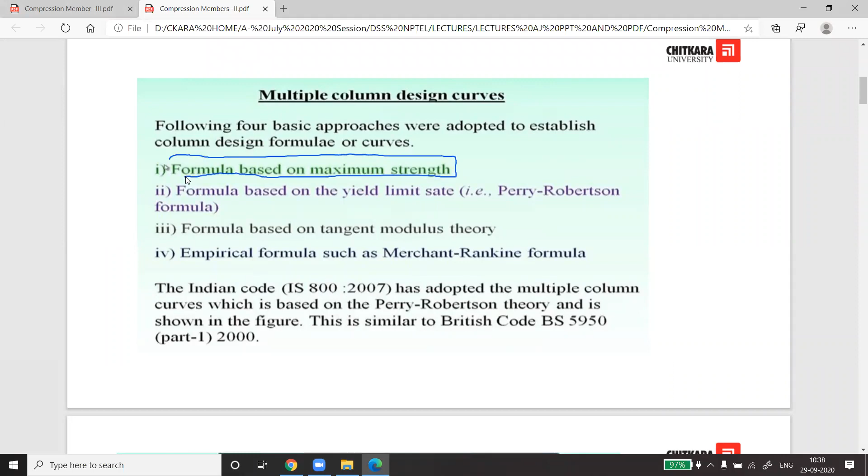The formula based upon the maximum strength is primarily governed by the crushing strength, so we are not following this one. The formula based upon the yield limit state - that's the Perry-Robertson formula - is, as per IS 800 code, the formula which is adopted by Indian standards.

So this is the formula that we shall be focusing on. IS 800 has adopted this formula, the Perry-Robertson formula. It is also written on the bottom part of the slides - the Indian code IS 800 has adopted the multiple column curves, which is based upon Perry-Robertson theory, and it is the same as adopted by the British code.

This is just reference information. More importantly, we are following this Perry-Robertson formula, which is based upon the theory given by him, and he has given multiple curves. If you read the bottom part again...

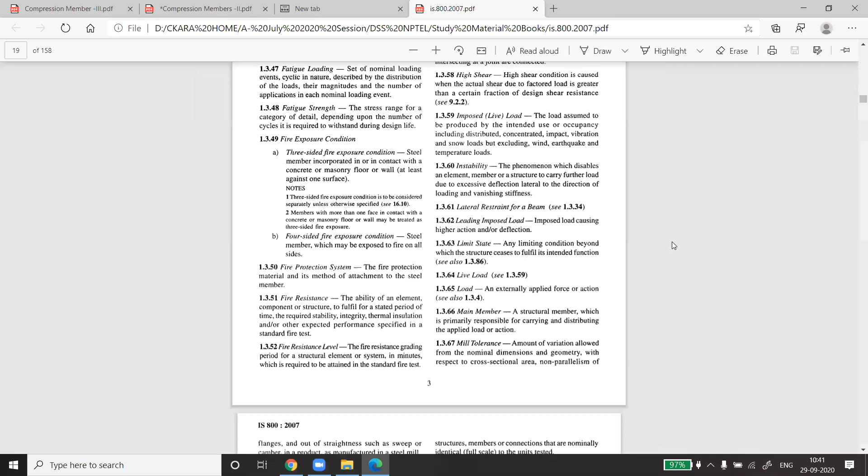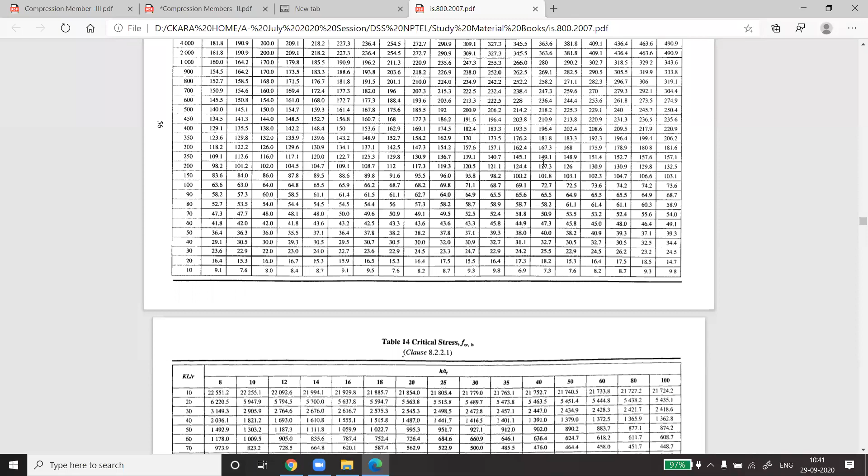But you should focus on this Perry-Robertson formula that is adopted by IS 800 2007, right? So this is just the reference slide, and we shall move on to the curves, Perry-Robertson curves, which are also given in your IS 800 booklet. I'm opening it, you can also open your IS 800 booklet. Go to page number 34, 35.

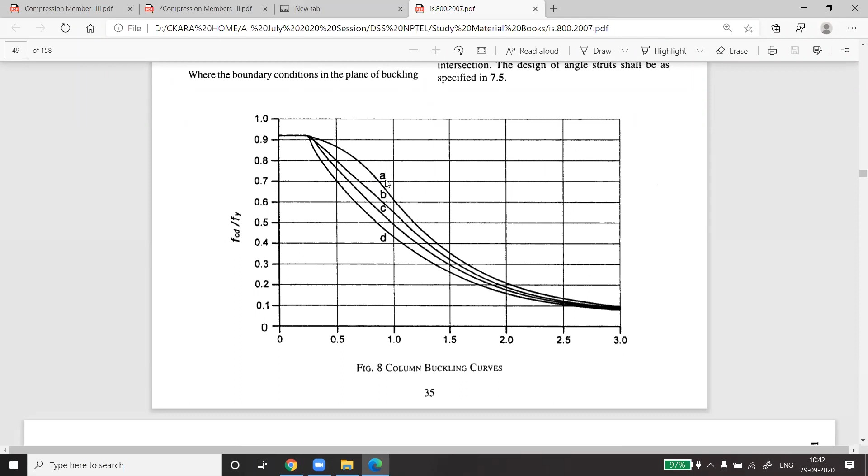If you see this page, these are column buckling curves, right? Yesterday we also had a little reference to the column buckling class, according to the slenderness ratio and the structural dimension of the column. So we are going to discuss the various classes: class A, class B, class C, and class D, right?

And these curves are the Perry-Robertson curves, based upon Perry-Robertson theory, and this has been adopted by IS 800 Indian standards, right? Just have to refer to this curve - you don't have to read anything from this curve because all these values have been converted into tabular forms, which we shall be discussing after a few slides. But this is just the reference.

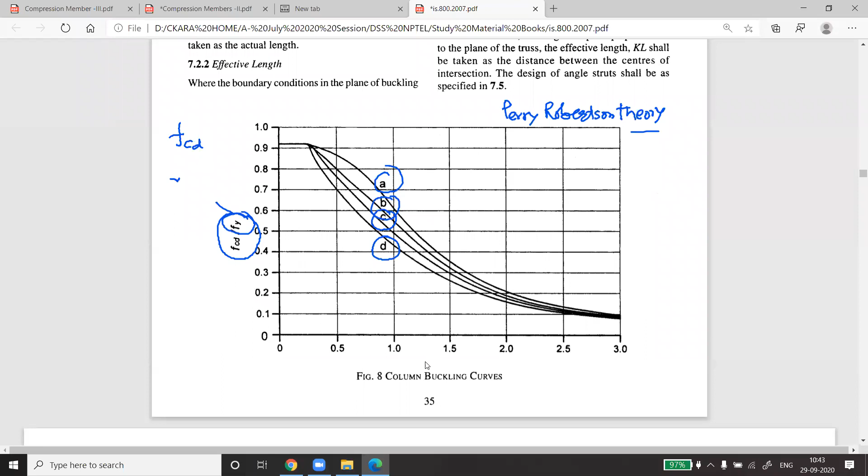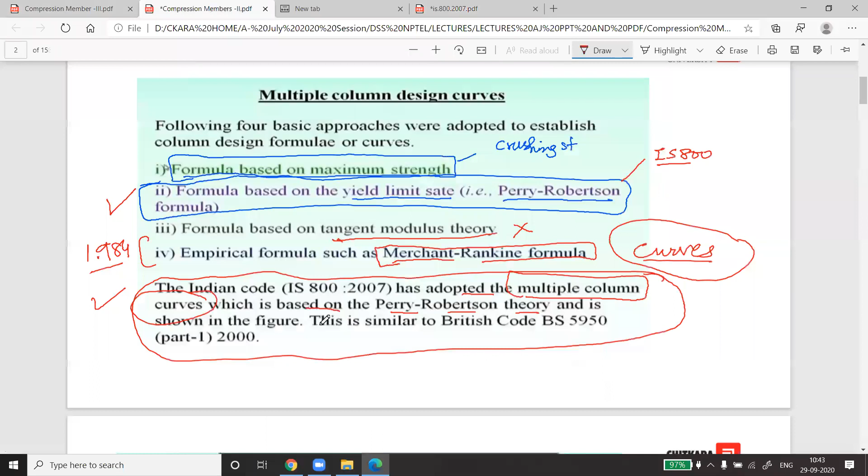This is the curve between FCD, the compressive design stress, and Fy, which is the yield stress. So these terms are clear. And along this direction, this is the slenderness ratio. So based upon these two factors, these curves have been given, and this is what we call Perry-Robertson curves, right? This is given in your IS 800 code as well.

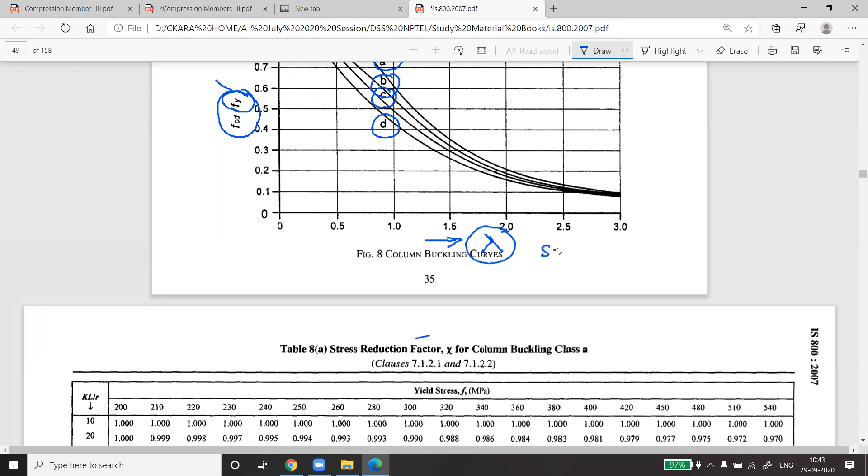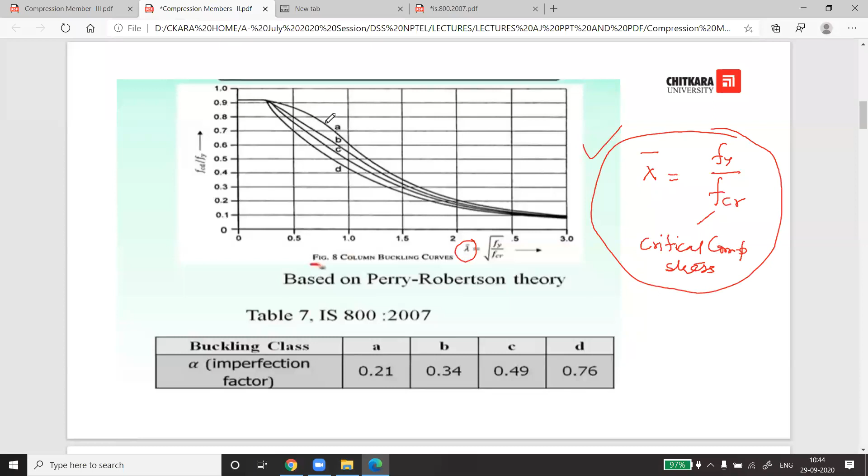Lambda critical is equal to Fy divided by FCR, where FCR is the critical compressive stress. But at the same time, one should not be worried about how to get the values from this, because all the values based upon these curves have been converted into tabular form. So that table we shall be discussing in the following slides.

And the second table, table number 7 - yesterday we were discussing also that based upon the sectional dimensions, cross sectional dimensions, like the length, width of the member, and also the thickness of that member. For example, this is a T section - this is flange, this one is web. So its thickness we write as TF, and web thickness is TW. All these dimensions are given in steel tables, and there is the width of the flange, we call it BF, and then height or depth of the section, we call it D or H, right?

So based upon these cross-sectional dimensions, we are going to define class A, class B, class C, and class D. And why do we need it? Because based upon class, which we call buckling class, we need the imperfection factors. For class A, the factor shall be 0.21 - when we use it, it will be more clear to you. For class B, it is 0.34, then 0.49, and 0.76 based upon the class.

Now in the next slide, this is the class - how do we define the class? Basically based upon the dimensions. And the same table is there in your IS code. I'll be opening the same page from your IS code, because you shall be referring to it all the time. You open table number 10.

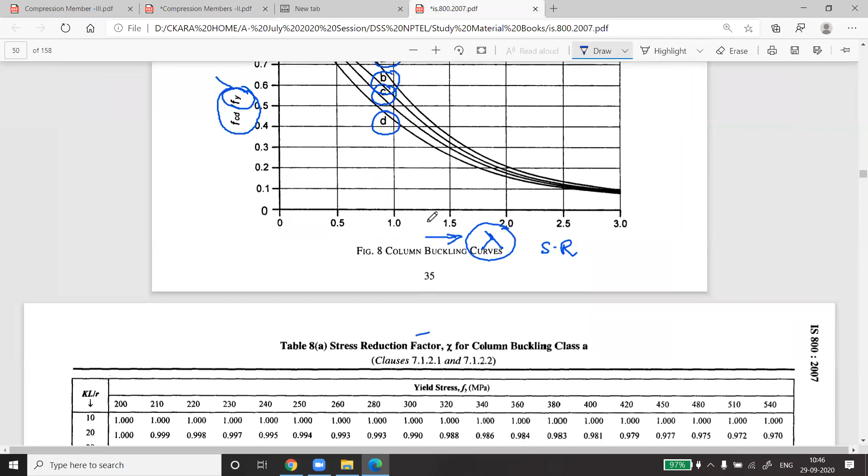This one. This is table number 10.

Buckling class of cross section. Same figure that I've taken in the slide, this is the page I have taken from table number 10 of IS 800. So I'm referring directly to that table. It has first the cross section,

then the limits, then buckling about axis, and the buckling class. When we talk about the cross section, there are certain dimensions attached with certain cross sections. The rolled I sections are the ready-made sections we get from the manufacturing industry. That height is there, this width is there - these are the two prime factors we shall be focusing on from this diagram. And thickness of the web, this is thickness of the web, and thickness of the flange.

So these are the four dimensions based upon which we shall be defining the buckling class. Ultimately we have to define the buckling class, and according to the buckling class we need the imperfection factors and various other calculations. And the second thing is the axis, buckling about axis.

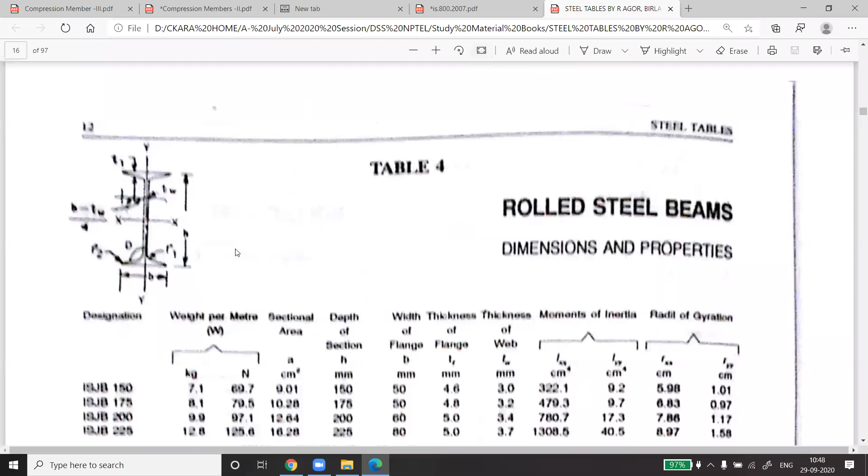if you look at the steel tables, actually, if you look at the steel tables, I'm opening it right now. This is the steel table. And I'm opening the I section part. So if you look at this steel table right now, though it is not very clear, all of you have got it, and if you look at the section axis here, this value,

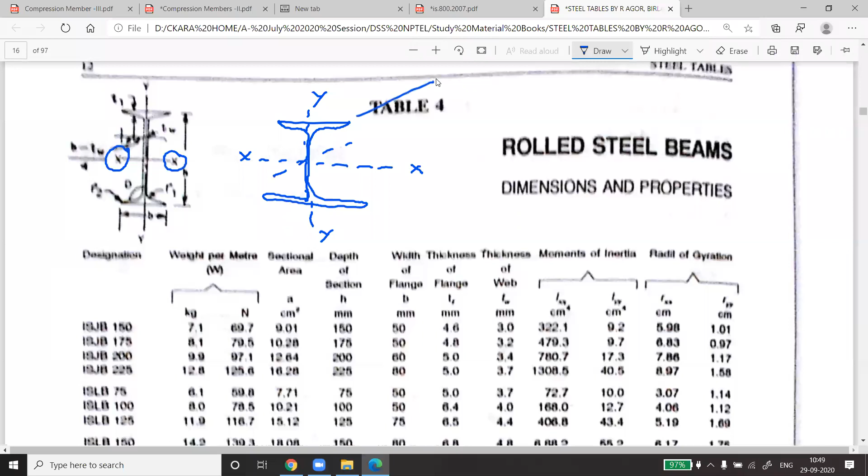I'm redrawing it. This has been mentioned as x-axis, and this has been mentioned as y-axis. And the third one, along the length of the member, it is referred to as z-axis. But we are using this member as a column - we are using this column, this member, as a column like this.

This is the I section, and we are using it as a vertical member. So in this case, this axis which is mentioned here as x-axis, we shall be referring to as z-axis. And this axis, this one, we shall be referring to as x-axis. And the y-axis would remain the same. I'm sure it's clear. So if you look at the diagram again, this IS page, this has been mentioned as z-axis.

The buckling can happen along z-axis. Buckling can happen along y-axis. Then when we are doing certain numericals, we shall be very clear. So we have to consider the weakest section - weakest section means along which axis buckling can happen first. So there are certain calculations based upon that we shall be defining it.

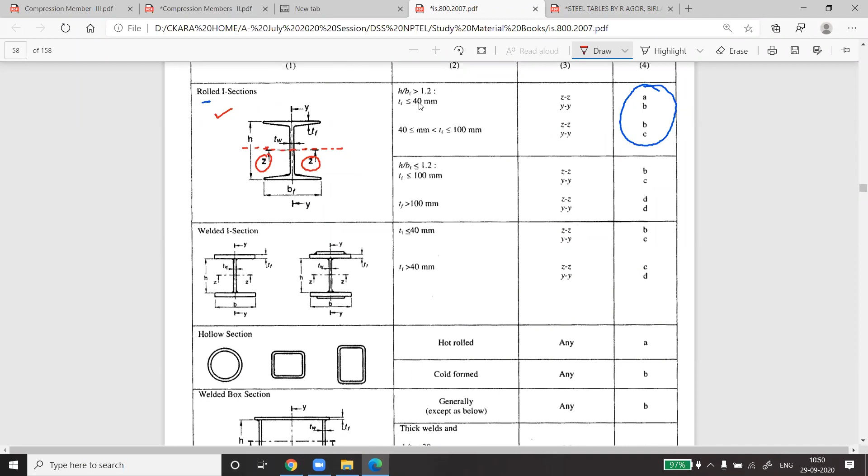But for now, you have to just see that based upon the sections and based upon the cross-section dimensions, we are going to define the buckling class. So how to define? There are certain limits: H upon BF - if it is greater than 1.2, and along with TF, TF is the thickness of the flange,

depending on the combination of these, there can be two failures - along z-axis or along y-axis. If it is along z-axis, we consider it as class A. If it is along y-axis, we shall consider it as class B. We will repeat this when we are doing the numericals. There are certain other values you don't have to remember, but as and when the case comes, we shall be referring to this table, and the primary function of this table is that we are going to define the buckling class - this is the target.

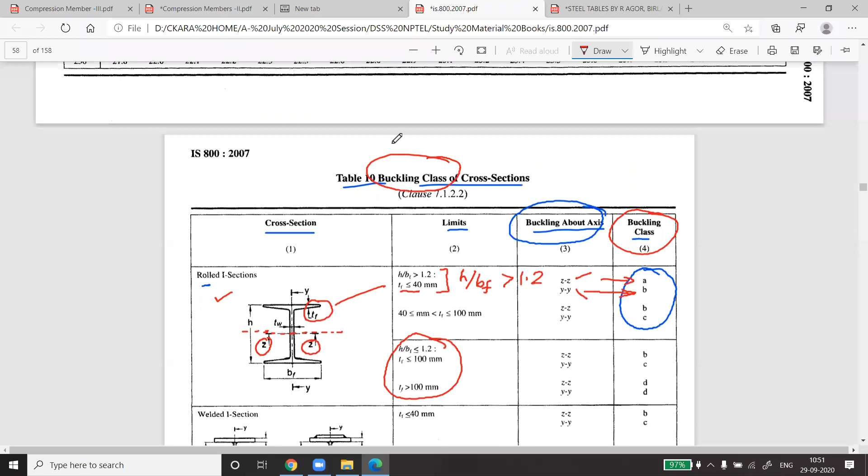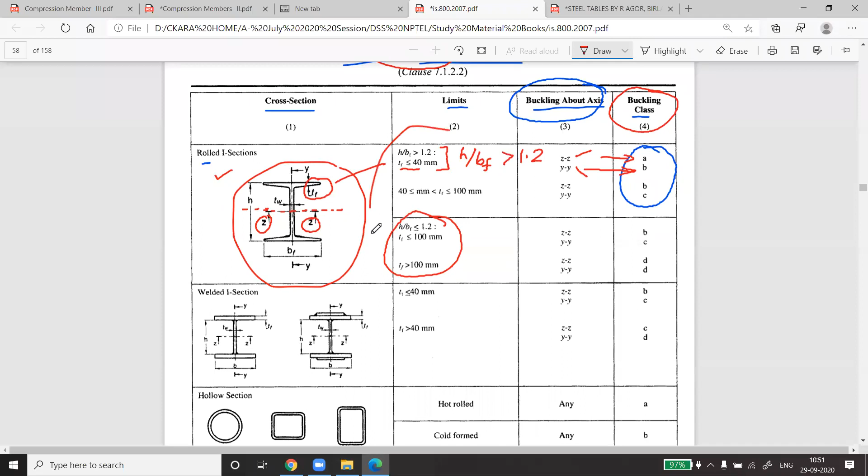So when we define the buckling class, we shall be referring to this table, and based upon these cross sectional dimensions, if it is a rolled section, we follow this criteria. If it is a welded section, we shall be following this criteria. If it is a hollow section, we shall be following this criteria. It's a welded box section, we shall be following this criteria. And if it is angle, channel, or solid section, or if it is a built-up member, we shall be following the respective criteria.

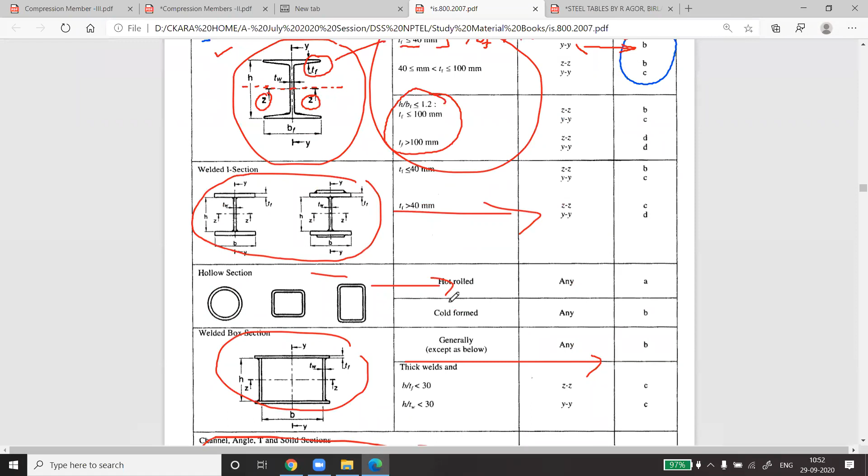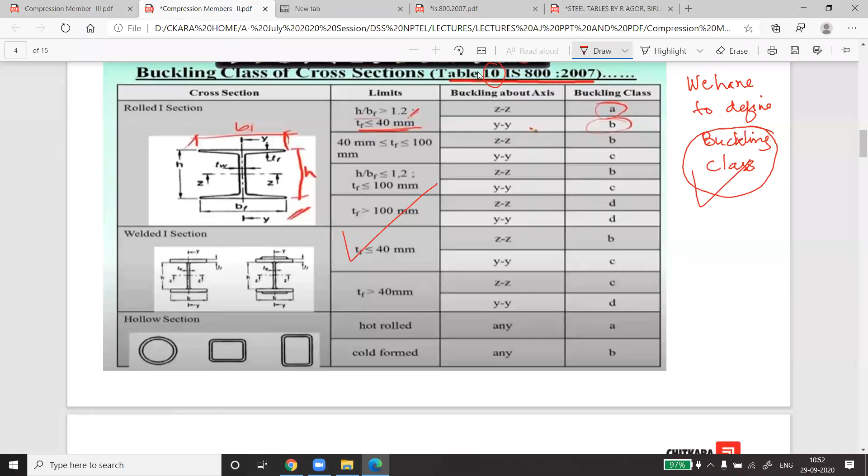So all these things we shall be clear when we are doing one numerical, and this is not that difficult as it looks, but just have to mention - refer this table to define the buckling class. So this is the table which has been reproduced from the IS. So all you have to remember is that we have to define buckling class before we design the member or find the strength of the member, because buckling class would define the slenderness ratio, and slenderness ratio would define the ultimate load carrying capacity of that member. Imperfection factors and all these things shall be clear from this table.

And this is the same table, the extension of that table already shown in IS 800.

So now coming to the design strength, our numerical work is about to start. Just be very clear and sure about this process. The good thing is you don't have to remember anything, just refer to the things.

So open the steel IS 800. This is clause 7.1.2. Already we referred that PD, design load capacity, has to be more than the load applied on the member. P applied, whatever load is applied on it, the strength of the member should be more than that.

And PD in general is given by AE into FCD. AE is the effective area of the member, and that shall be governed by clause 7.3.2.

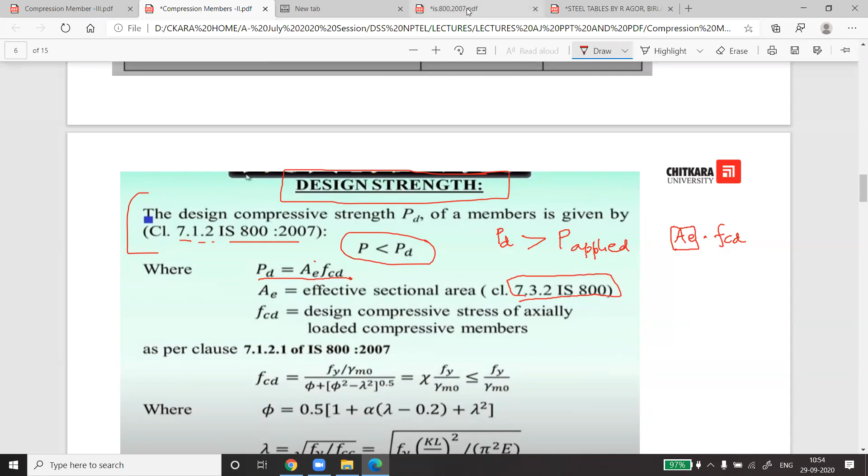I can open it, this is the clause I was reading. Design strength 7.1.2: P shall be less than PD, or PD shall be greater than P. And PD is given by AE into FCD, where A is the effective area.

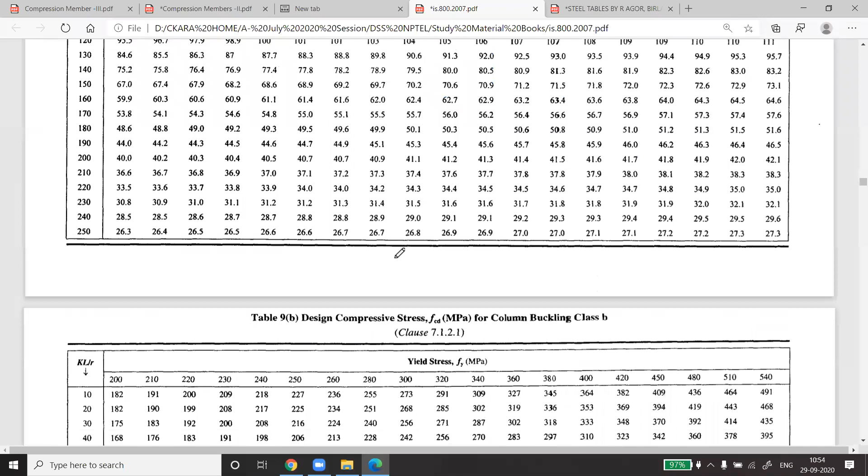And effective area is given by 7.3.2. You can read it from there. This is effective area - if you read it, the gross sectional area shall be taken as the effective sectional area of all compression members. For example, you take an I-section here.

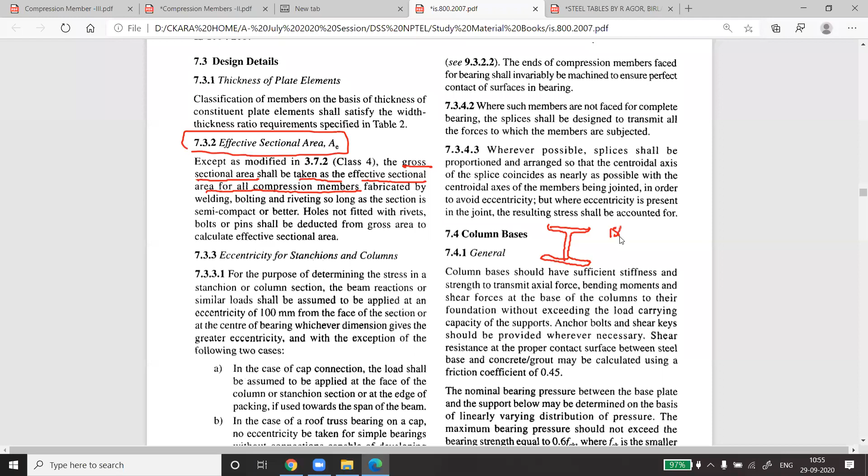You take an I-section, ISHB 250. If you open the steel tables for ISHB 250, this is the steel table. Look at ISHB 250 - there are two values here, one is 51.0 kg per meter, another is 54.7 kg per meter. This has to be defined for you. You have to get the area from this, and area is given in the fourth column. So this is the area.

That's all. So here there is no difficult task. You just have to read the relevant column to get the area.

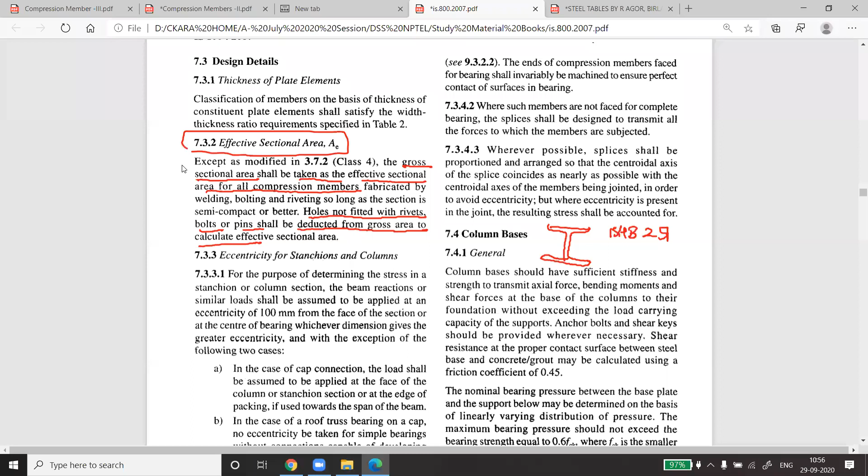If you keep reading this 7.3.2: the holes not fitted with rivets, bolts or pins shall be deducted from the gross area. If bolts and rivets are fitted, then we shall consider the total area. But if there are holes without rivets fitted, then we will subtract that hole area. This is the only meaning of this effective area.

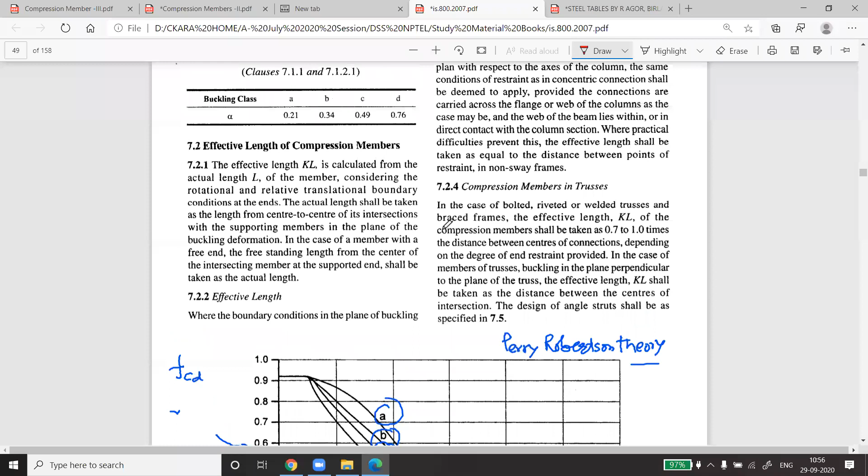Coming back to the slide, this formula is given in the code as well. I'm shifting to the code page so it will be easier to read. This is section 7, beginning of the section, and this is the page. 7.1.2.1 - primarily what we need to do is find the FCD.

Once we find FCD, we shall multiply it with area - this is the formula. FCD multiplied by area. Finding area is not a big task, we can get it from the steel tables or directly from the geometry of the section.

The second part is FCD. How to get the FCD? That is defined by this formula. So FCD, or the design compressive stress, is given by Fy divided by gamma MO. Gamma MO is clear to you, Fy is clear to you - for example, 250 Newton per mm square, divided by phi.

Plus, within bracket, phi square minus lambda - lambda already we have defined, lambda is the slenderness ratio - whole raised to power 0.5. And what is phi? Phi is given by this formula: 0.5 times 1 plus alpha times lambda minus 0.2 plus lambda square.

Now there is another term coming here - alpha. So the formula is to be calculated in this direction. To find FCD, we need to first find the value of alpha. Alpha already we have defined - somebody can tell me what is alpha?

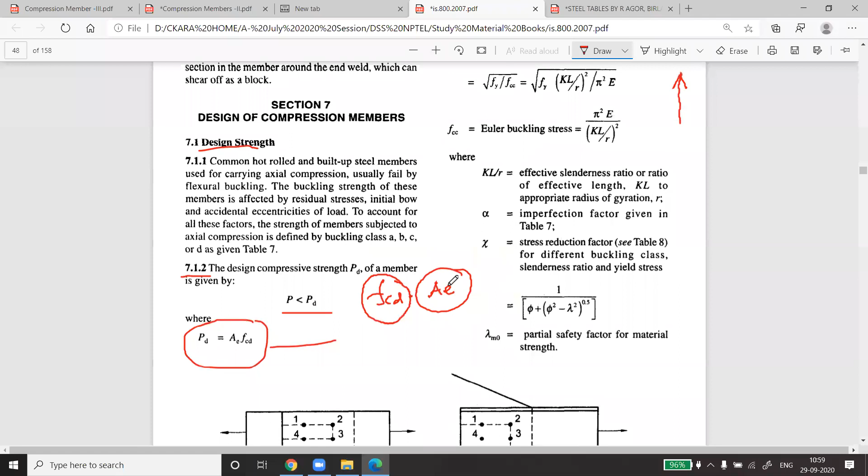What is alpha? It's the imperfection factor. So to find the imperfection factor, what do we need to find? The buckling class - buckling class A, buckling class B, buckling class C. That was table number 7. So to find the buckling class, we need to find the geometry, and based on the geometry we find the formula.

Then we'll work out the value of phi. And lambda is the non-dimensional effective slenderness ratio, calculated by Fy upon FCC - we did this yesterday too. The value of FCC is put into this. And what is K? K is the factor calculated based upon the end conditions. Yesterday we did table number 11 - I am showing it again.

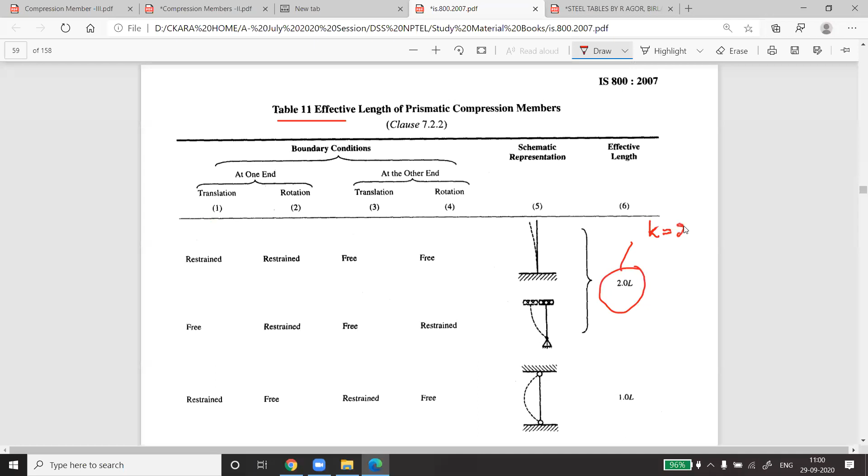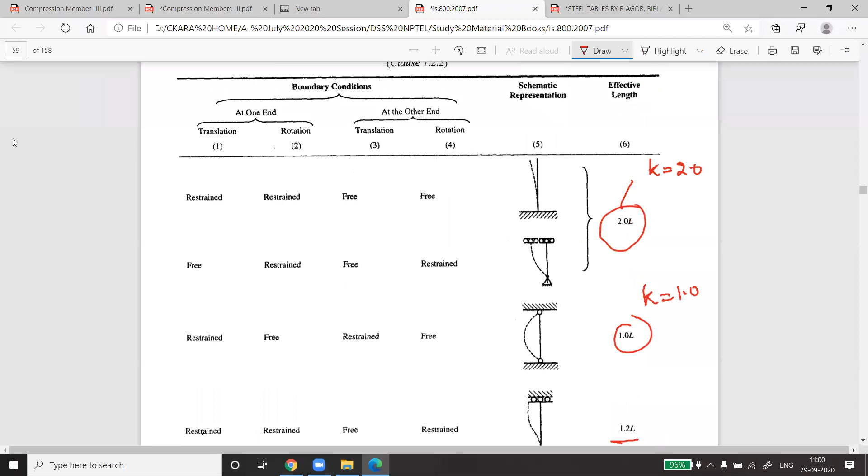This was table number 11, and this is the value of K. If here 2 is written, then K is equal to 2. In this case K is equal to 1, right? In the third case this is 1.2, so K is 1.2. Here K is 0.8. Here K is 0.65. So we'll work out K according to the end conditions given in the numericals.

So coming back to the code part, that formula, we will work out K. That length shall be given to you.

Then R, R is the appropriate radius of gyration. We consider two gyrations - one shall be RZZ and another shall be RYY. Whichever is minimum between the two, we will consider that. That shall be clear when we calculate it.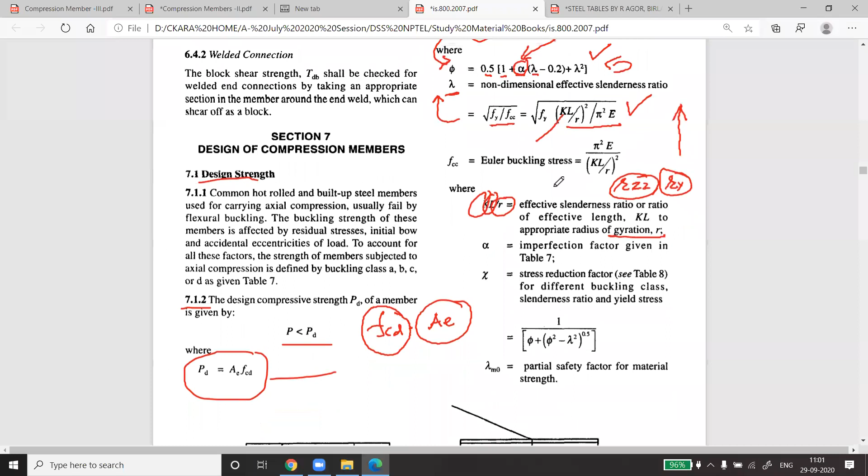So this is the formula that has to be used to find lambda. Lambda is further used to find phi, and phi is to be used. I'm just rubbing it off to make it clear.

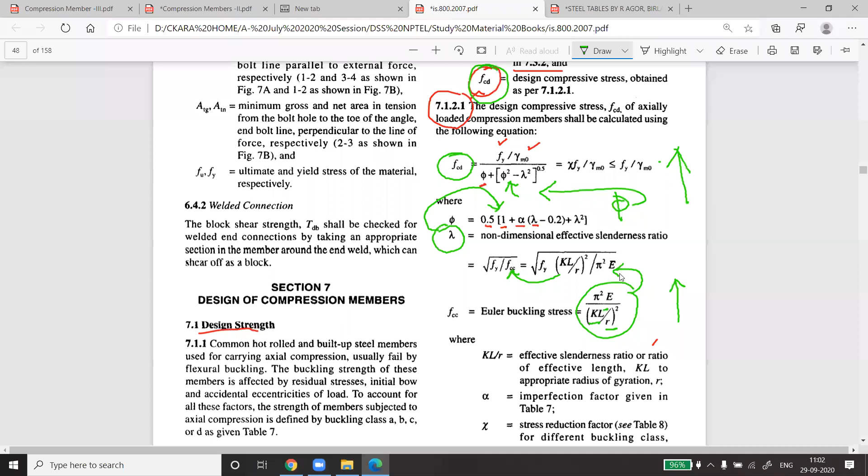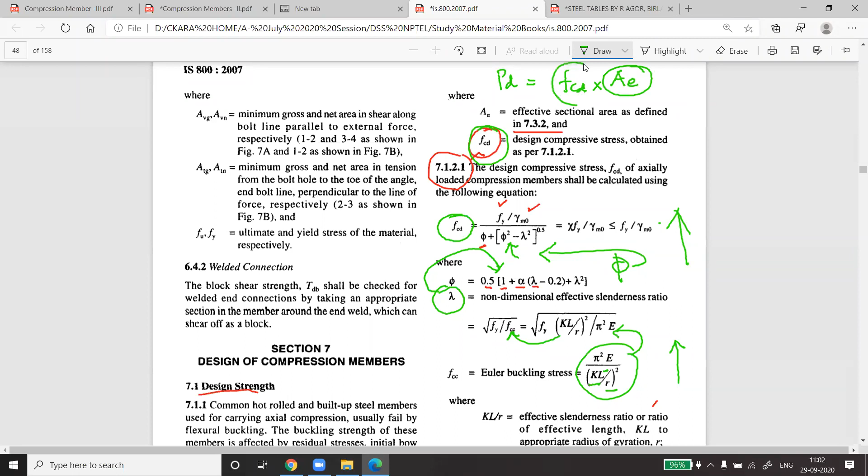So once we get the value of FCD, then we can get the strength - PD shall be equal to FCD multiplied by AE. AE is to be calculated according to the geometry of the member, and FCD as I just mentioned. This shall be very clear when we do the numerical.

There's another one. Can somebody tell me what we call this one? The one I just highlighted in green, what do we call it? Can somebody tell me, what is this?

This one is phi, right? This one is lambda. What is this? How do we call it? What is its name? Anybody?

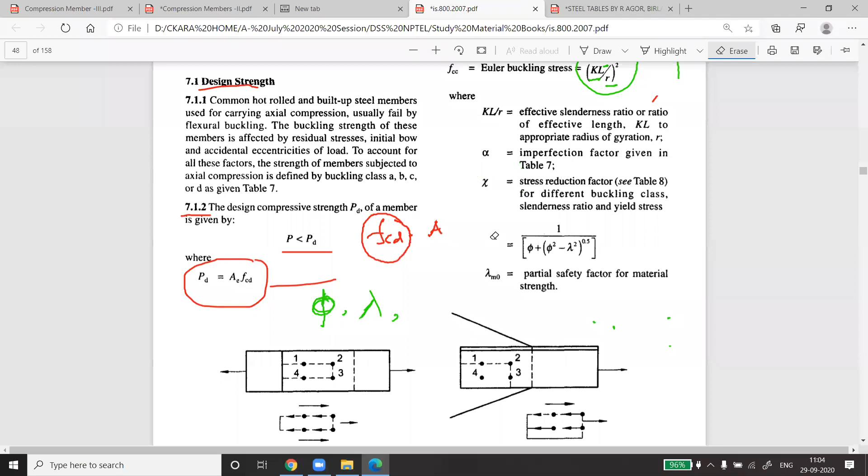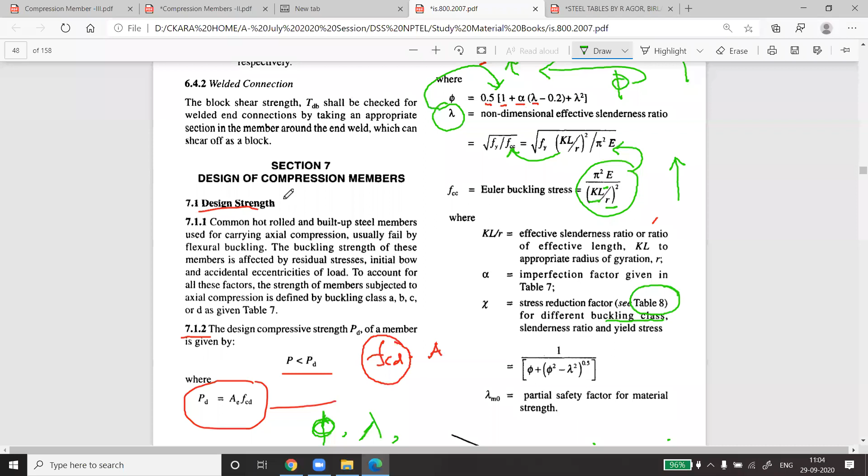So we won't need this in the calculation, because we have already taken this factor into consideration. So this is what we call the stress reduction factor, and this is as per table number 8 for different buckling classes. And what is table number 8? There are A, B, C, D - there are 4 tables. I'll show you this.

These are the tables - stress reduction factor, table 8, and this is the value of chi. 8A for class A, table 8B for class B, table 8C for class C, and table 8D for class D, right? So we will be referring to this.

I'm sure you are able to read this table. This is slenderness ratio. Along this direction we have the yield stress. Generally we will be referring to this 250, right? Whatever value of KL upon R we get, accordingly we will interpolate the values to find them, right?

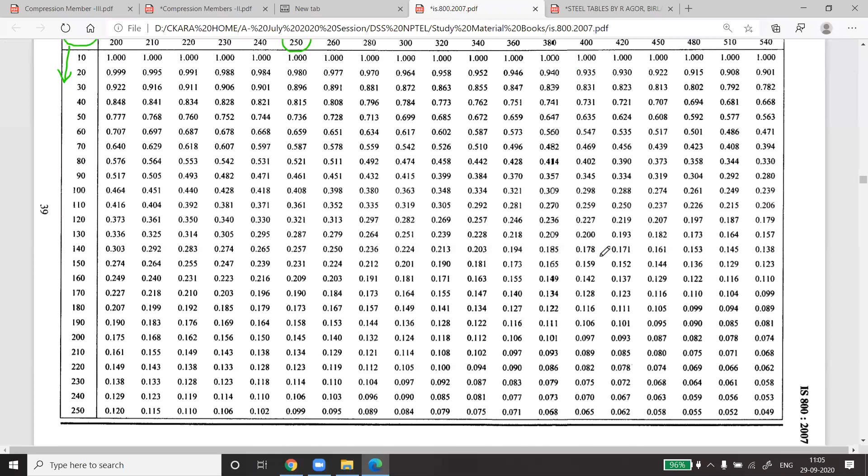A very small exercise, if all of you can do it. Can you find - okay, I'm writing it - can you calculate from this table? I'm referring to table number 8D, right? In 8D, find the value of

KL upon R. If it is 75, KL upon R if it's 75, then what shall be the value of chi for FY 250? Quickly calculate and tell me.

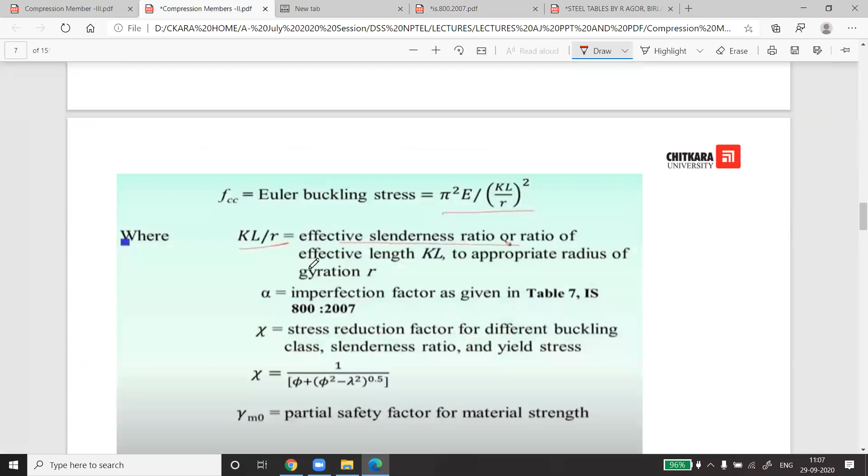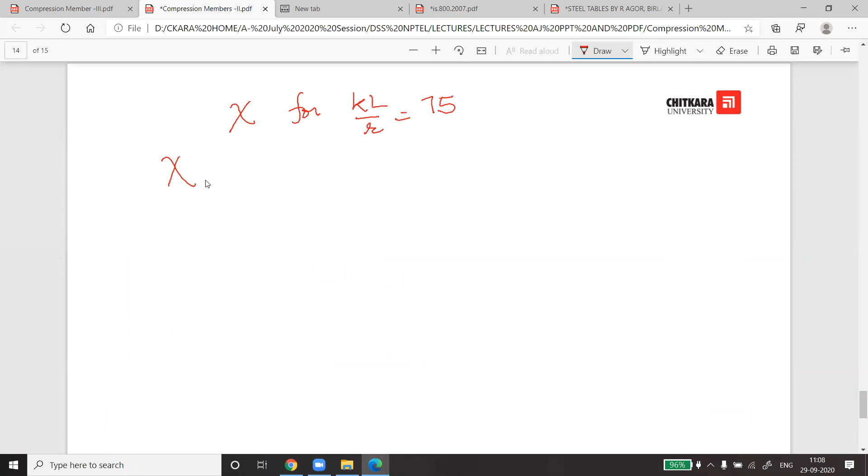मैं इसको दोबारा ड्रॉ कर देता हूँ. I'm just coming to the blank page. Okay, this is the blank page. We have to find the value of chi for KL upon R is equal to 75, right? The value of chi for 70, the value of chi for 80 from the table, and Fy is 250 MPa.

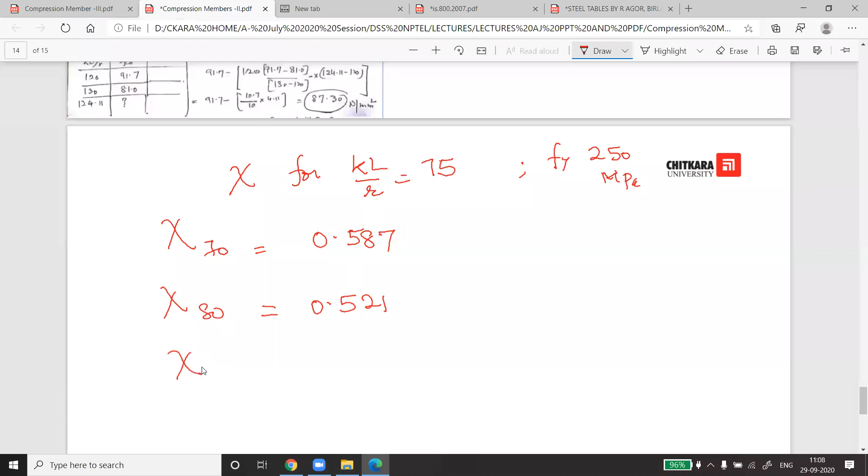Value of 70 as per table is 0.510... it is 0.587 and it is 0.521. So we have to find the value of chi for 75. How much? This is the question, right?

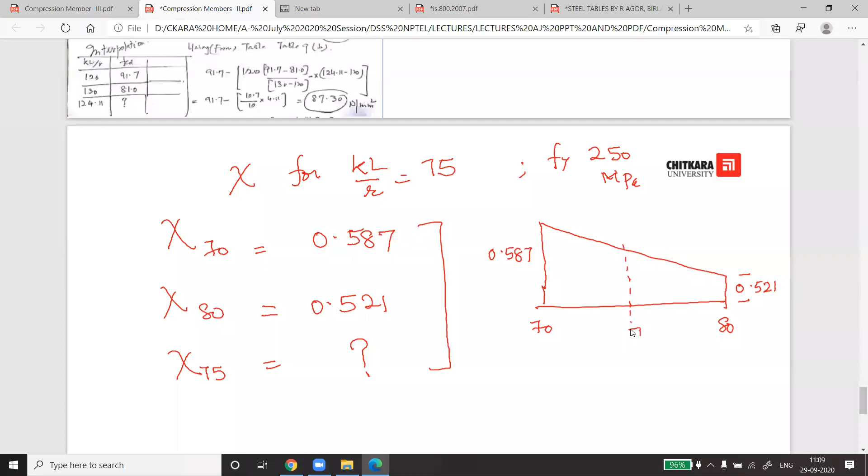So interpolation हम ऐसे करते हैं, like this is the mathematic process, right? This is 70. The value is 0.587. This is 80. The value is 0.521, and we have to find the value of 75. How much is this? Clear?

जल्दी से बताएं. The chi for 75. मैं लिख देता हूँ, अगर किसी को समझ लग जाएगी तो उसको नहीं लगा तो पूछ लेना. 587 इतना तो श्योर है कि 0.554, 521 और 587 के बीच में होगी, राइट? So 0.554, राइट.

ठीक है. अगर किसी को नहीं समझ लगा तो मैं यहाँ पर लिख देता हूँ हाउ डू वी डू इट एक्चुअली, राइट? सो इट शैल बी लेसर देन 0.587. कितना लेस होगा वो उसको हमें वर्कआउट करना है, राइट? तो 70 है तो इतना है, 80 है तो इतना है, और जस्ट अ मिनट.

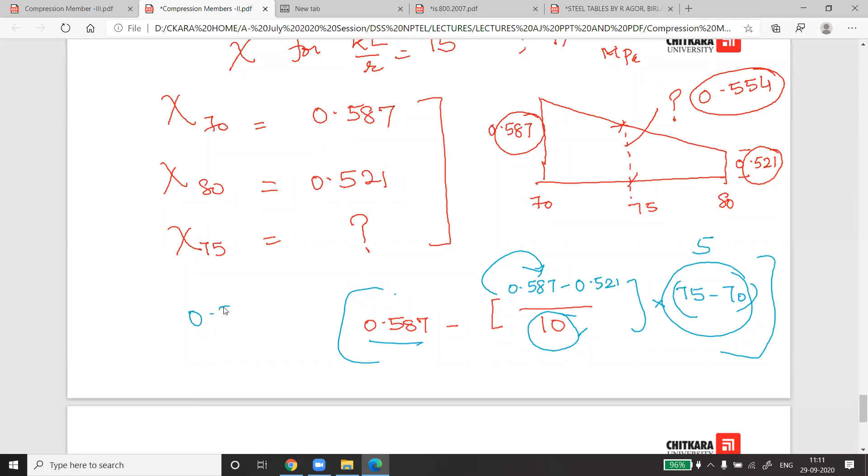(0.587 minus 0.521) multiplied by (75 minus 70), राइट? 10 के पीछे इतना चेंज हो रहा है और 5 के पीछे कितना होगा? दिस इज 5, दिस इज 10, और इसके पीछे ये वैल्यू का वर्कआउट करेंगे. अगर कैलकुलेशन सही है तो इट शैल बी 0.554. This is what we call interpolation. So one has to be very, very sure about interpolation because we shall be using it, right?

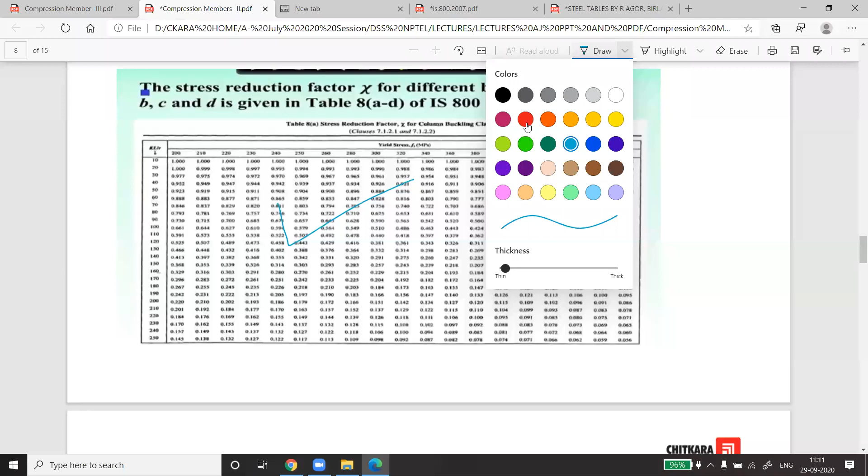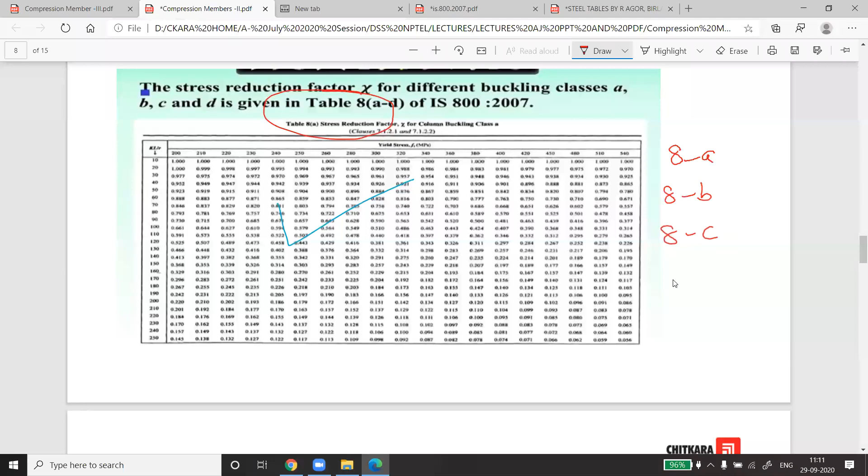So I'm moving ahead with these slides. So the formula is completed, and these are the tables we shall be referring. इसको अभी देखने की जरूरत नहीं. Only thing that we need to know that we shall be using table 8. 4 टेबल A to D हैं, ये हम यूज करेंगे to find chi - 8A, 8B, 8C, and 8D. These are the 4 tables to find the value of chi, right? And similarly, there are 4 tables to get the value of FCD.

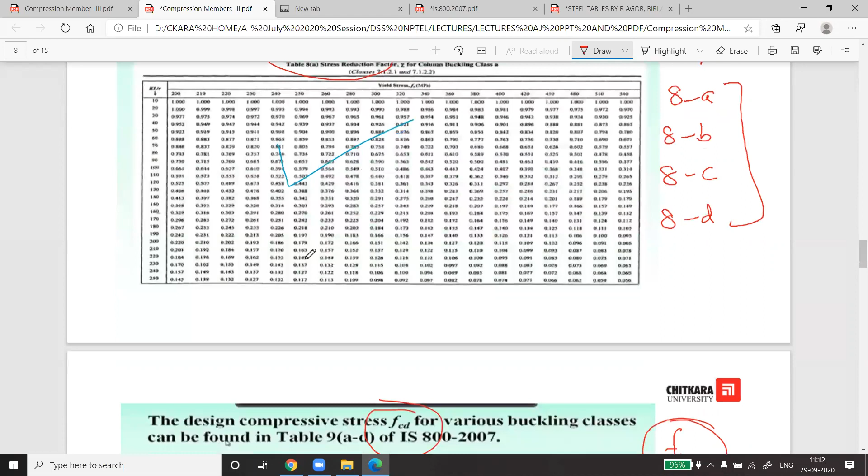डिजाइन स्ट्रेंथ को हम सीधा भी कैलकुलेट करेंगे एंड फार्मूले के साथ भी कैलकुलेट करेंगे। देन विल सी कि फार्मूला यूज करना आसान है या टेबल यूज करना आसान है। तो जो भी आपको कन्वीनियंट लगेगा देन वी कैन रेफर। सो दीज आर आल्सो 4 टेबल्स टू फाइंड द एफसीडी डायरेक्टली। दिस फार्मूला, this FCD, all this value we can get from the table directly without using the formula, right? And to use this formula, we have to be very, very sure about how to do the interpolation and which table has to be used.

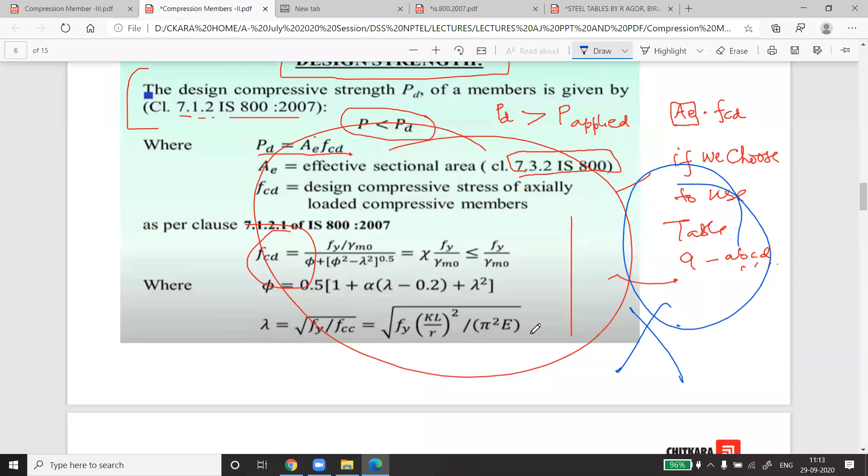So again, there are 4 tables depending upon the class - Class A, table number 9, table number 9B, table number 9C, and table number 9D. So this is the formula that will give you the direct value of FCD. अगर हम टेबल यूज करेंगे देन वी विल नॉट बी रिक्वायर्ड टू अप्लाई दिस फार्मूला। इफ वी डिसाइड टू चूज टेबल 9 ABCD, राइट, then we don't have to use this formula, right? So we can get the value directly from the table. So this is all about, and we shall start with the numerical.

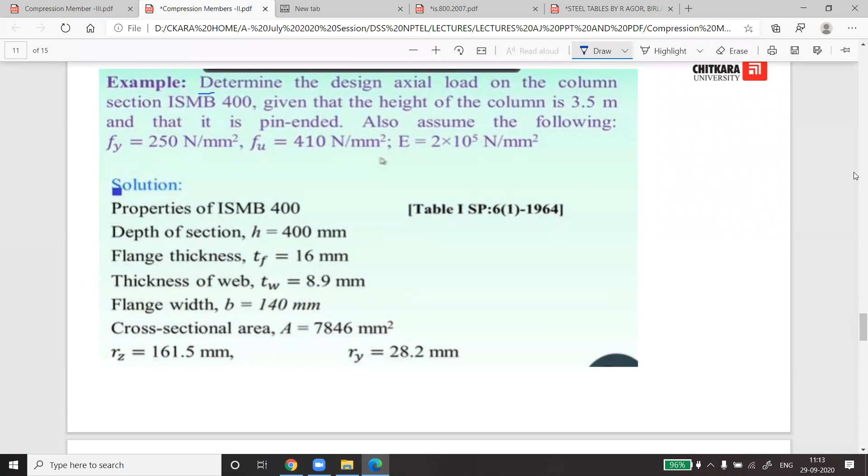Calculate the design axial load on the column. Again, I'm telling you, you have to learn to read the numerical statement of the numerical. Each and every word gives you some information, right? First of all, this axial load. Axial load means no eccentricity, so we are dealing with the plane case. Axial load on the column - the column itself means this is a compression member.

And then next is ISMB 400. The information for this has to be taken from either SP 6(1)-1964, but we are using the steel table. The same information is there in steel tables. So we have to read it from the steel table.

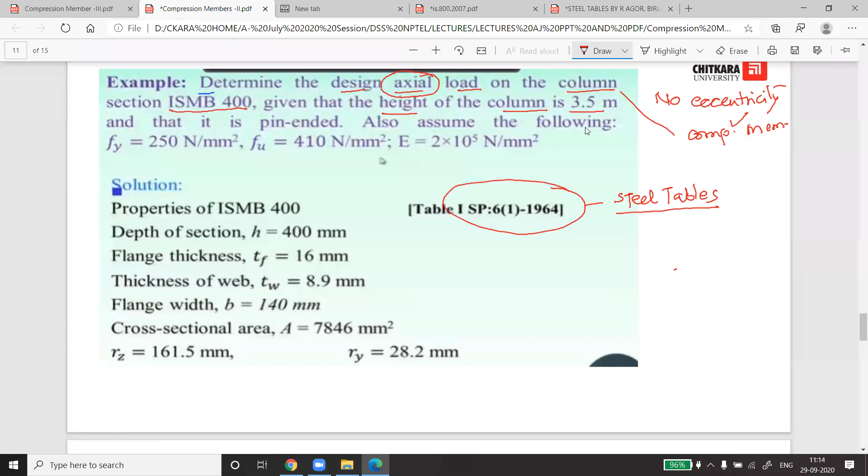And the next is the height of the column is 3.5 meter. That means the actual length of the column is 3.5 meter, that is 3500 mm. And next line is that it is pin ended. Pin ended means end conditions. End condition will give you the effective length. Based upon the end condition, we can work out the effective length.

So we will be referring to table number 11 to get the value of LE. Now next line is assume the following: Fy that is the material is given to you, Fu is given to you, and E is the modulus of elasticity, that is also given to you. These are some values which you might have remembered by now.

ये आपको ऐसे ही याद होनी चाहिए. If these are missing, you can always assume it. Now our job is to find what? Our job is to find the design axial load, and design axial load as per formula is what?

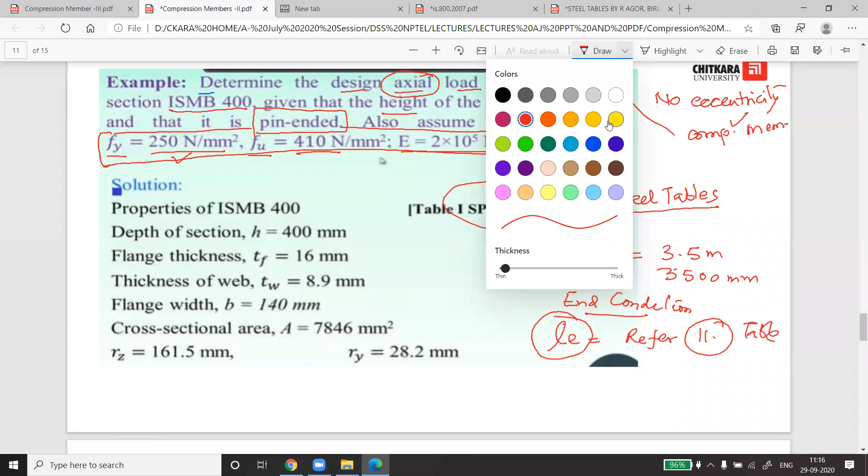Design axial load बेटा कैलकुलेट करना है. इसका मतलब क्या है, क्या करना है? अगर फॉर्मूले में देखेंगे तो we have to find the value of PD, and PD is given by AE multiplied by FCD. अब AE is directly given in the table, ये आपको स्टील टेबल से देखना है, राइट? तो स्टील टेबल से कैसे देखना है?

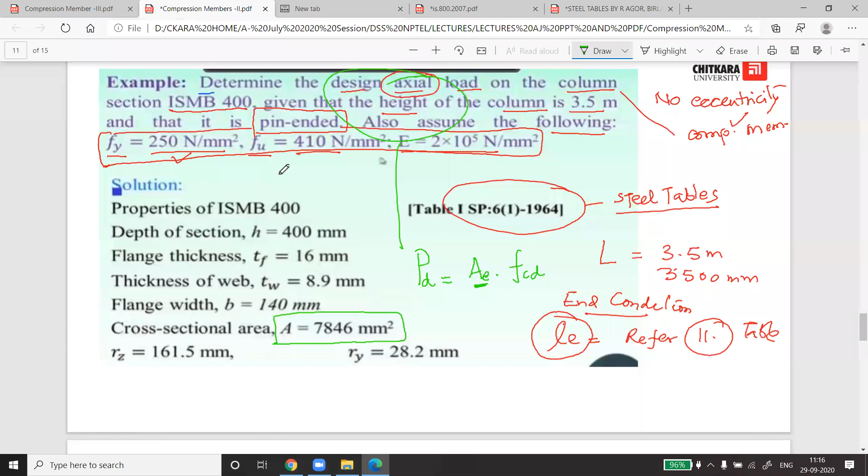नाउ वी आर मूविंग टू द सॉल्यूशन. सो कौन कौन सी इंफॉर्मेशन चाहिए हमें स्टील टेबल से? सो वी विल बी मूविंग टू द हैंड रिटन नोट्स जो मैंने आपको कल भेजे थे. सो दिस इज द सॉल्यूशन, जस्ट रीड इट. आई विल बी रीडिंग इट फॉर यू, राइट? आप स्टील टेबल खोल लें।

for ISMB 400 from steel table. I'm repeating H. अब स्टील टेबल की वैल्यू आप देखें, अब अगर स्टील टेबल आपका खुला है तो आप ISHB 400 - ISHB 400 आपको वेट भी साथ में दिया हुआ है, लेकिन ISMB 400, not HB, this is ISMB. So we'll be referring to ISMB 400. ISMB is here, so ISMB 400 is this, right? So area of this is given as 78.46.

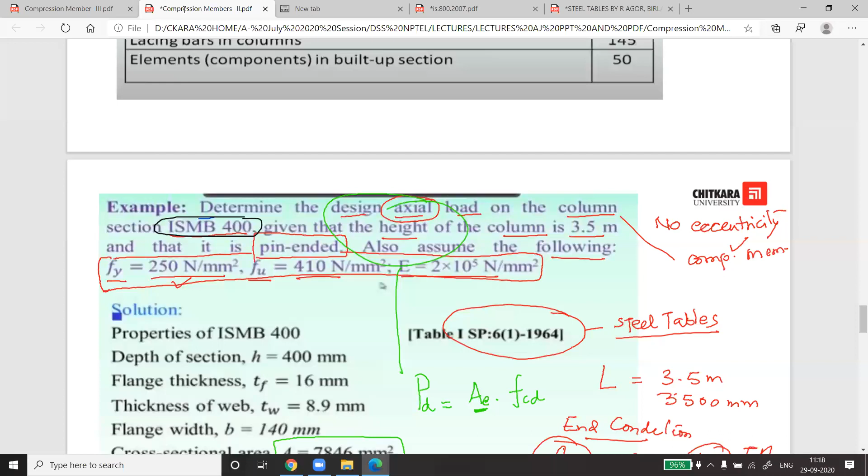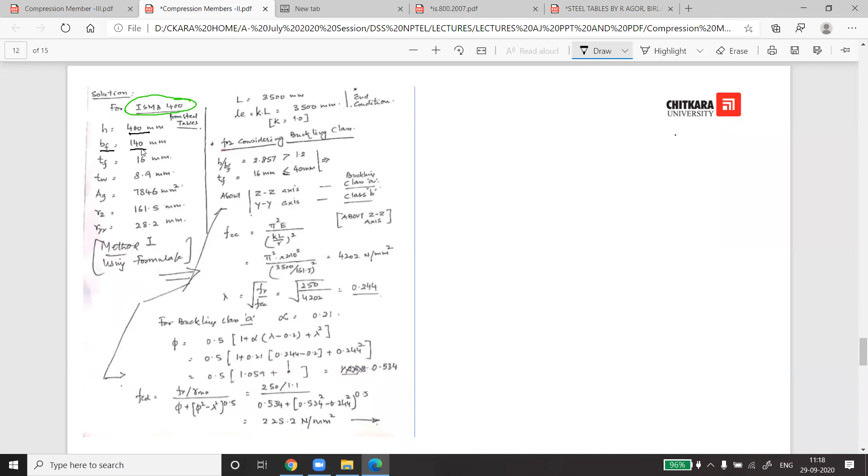This is in centimeter square. The area is 7846 mm square. So we have taken this value from the steel table. H is the height of the section, BF is 140. All these values have been taken from the steel table. TF is 16, TW is 8.9, area मैंने आपको पहले लिखा दिया, RZ and RYY - these are the two radius of gyration. We have to take it from the steel table.

I'm going back to the steel table. Now you can read it. If you see this, the depth of the section H, ये हमने steel table से लेना है, width of the flange B, thickness of the flange T, thickness of the web TW, and radius of gyration. There are two values - one is R, इसमें आर एक्स एक्स लिखा हुआ है, मैंने पहले क्लियर कर दिया कि वी शैल बी रीडिंग फॉर द कॉलम. अगर हम बीम को रेफर करें दैन इट शैल बी एक्स एक्स, अगर कॉलम रैप बनाएंगे दैन इट शैल बी आर जेड जेड। So this is ry and this is rzz. So these values are taken from the steel table.

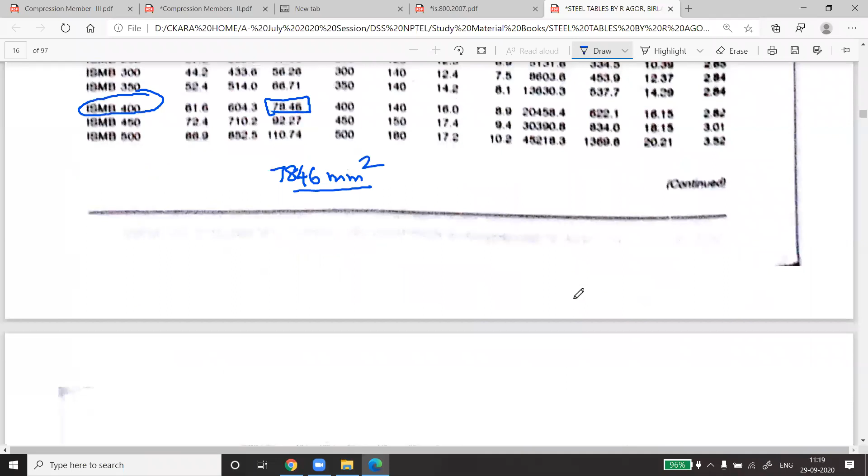Moving to the solution part. So all this information is to be taken from the steel tables. So once we are done with this basic parameters, now we start solving the numerical. L is 3500 mm, it is given to you. End condition is given to you, that is pin ended, and for pin ended K is 1.0.

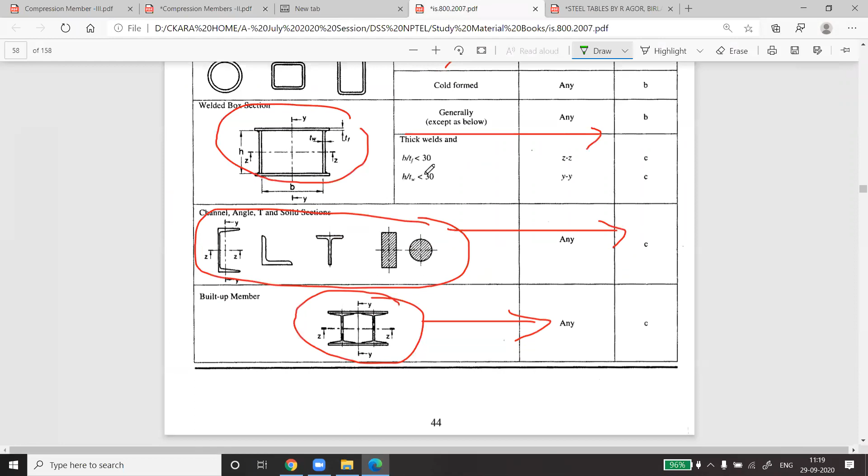If it is pin ended, the effective value of K is 1. So if the value of K is 1, you should start writing it here. So that means LE is equal to L, and that is equal to 3500 mm, right?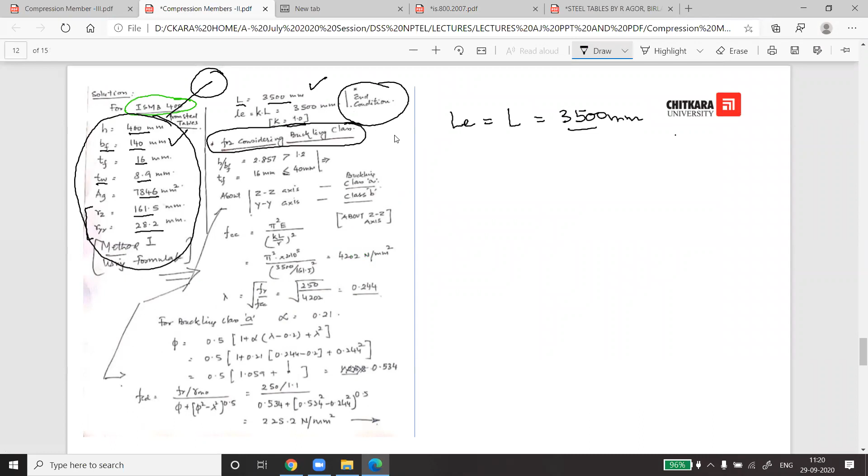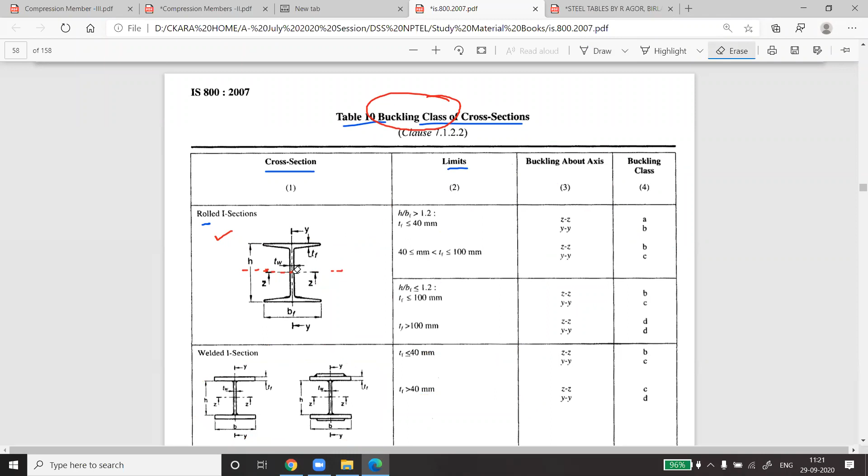Now, as I made you clear that we need to calculate the buckling class. So according to buckling class, you will be able to work out the value of phi and lambda. So buckling class as per I section, if you look at the buckling class table that defines the buckling class, you have to go back to the IS page and see this. I'm now erasing the other things. So if you see, this question falls in the very first column.

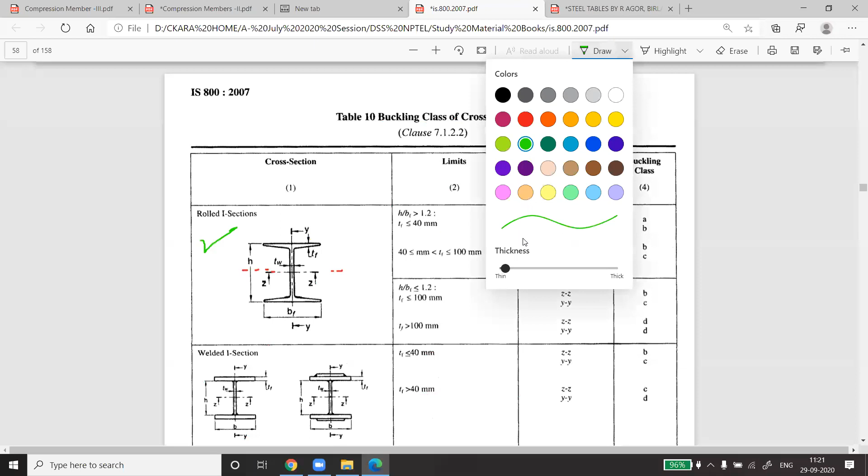So in this we need to calculate H divided by BF. H divided by BF, in our case, H is 400 and BF is from the steel table. How much is BF? BF from the steel table is 140. So we work it out from this: H upon BF is 400 divided by 140. This comes out to be 2.86, and it is more than 1.2.

The second criteria, if you look at the IS code, we need to check what is TF. So what is TF? How much in this case? The value for this came out to be 2.86. What is the TF value? It is 16, sir, 16. It is less than 40, so it is less than 40. So we are considering this class, falling into this category.

In this category, there are two classes. We have to consider Z or Y. So if we are considering buckling along Z, we are into class A. If we are considering buckling along Y, we are into class B.

To start with, practically we take the minimum radius of gyration, because if you see the table, we have noted down two values. One is RZZ, this is 161.5. The other value is RYY, and this is 28.2. For your practice, we will calculate with both values. We'll be considering RZZ, and this will be class A. If we consider buckling along the y-axis, this will be class B. So we will be doing two calculations.

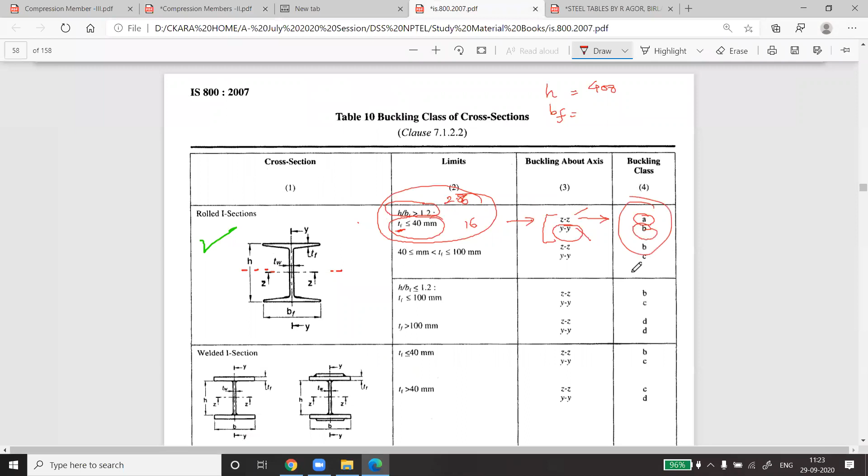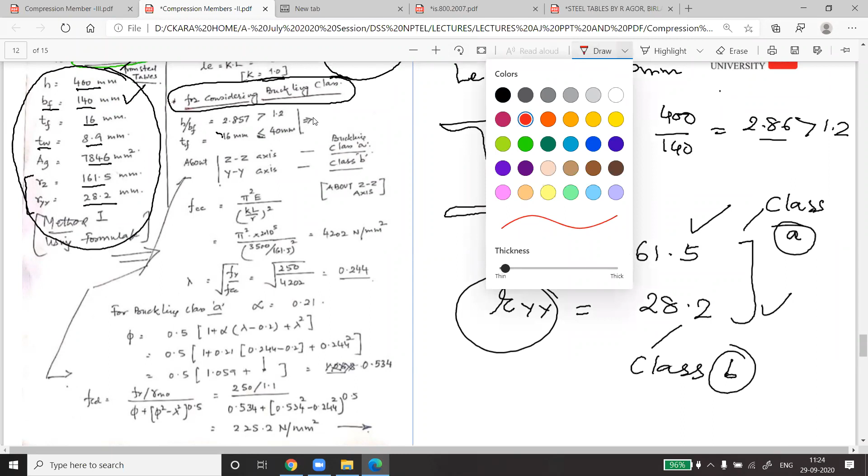So that's what I have written here. According to this, there are two classes, one class A for ZZ and class B for YY. So this is how we calculate, I have also written it on this page for you. Let me mark it in red. So this value we have explained. Based upon this, we have to define the class: ZZ class A, YY class B. So first of all, we'll calculate about the ZZ axis.

About the ZZ axis, FCC is the formula that is already there in the code, that is pi square E divided by KL upon R square. Based upon this, we're putting all the values: E is 2 into 10 raised to the power 5, K is 1, L is 3500, R is 161.5. So when we are considering ZZ, we are considering this value. Based upon this, FCC is coming out to be 4202 Newton per mm square.

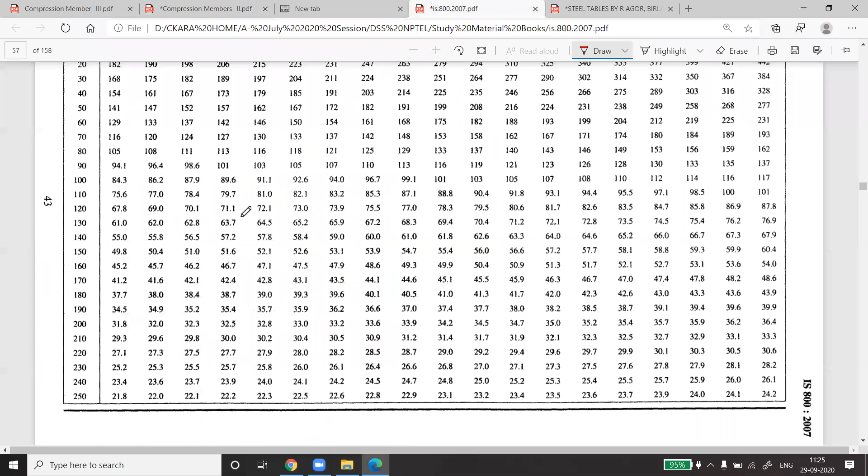So according to this we will calculate the value. Putting all the values into the phi formula, we work it out, and this is coming out to be 0.534. So now we have the value of phi, we have the value of FCC.

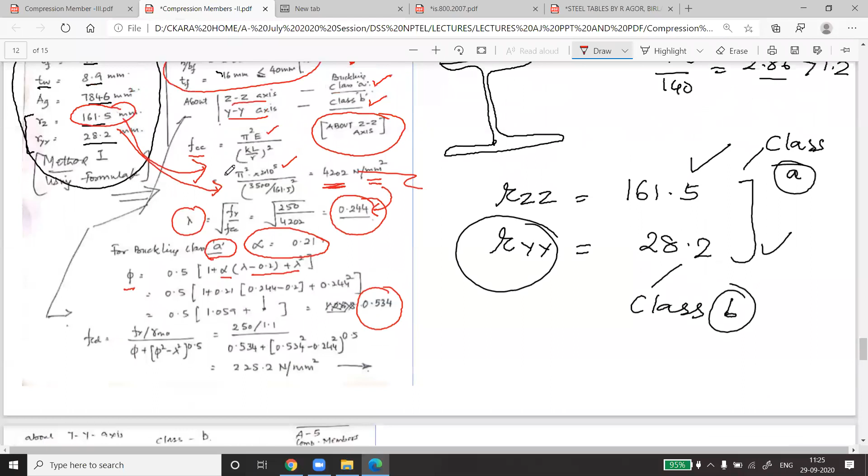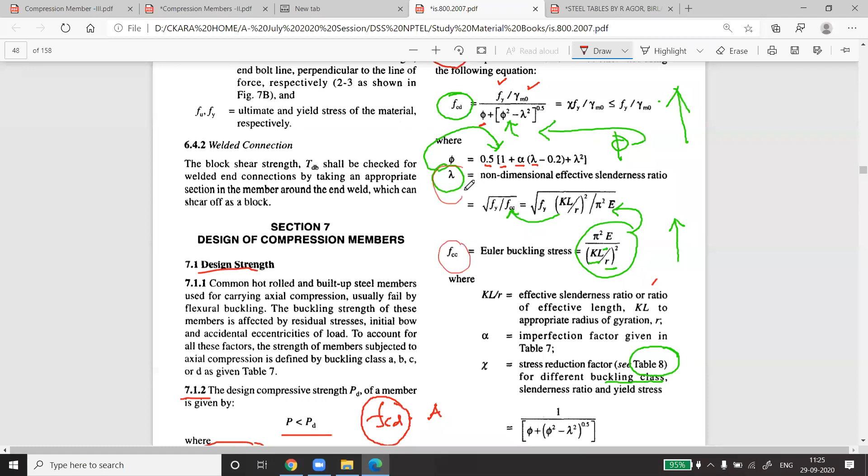As I told you, in the code itself we have to work out the formula from the bottom. Now we have worked out the value of FCC, we have worked out the value of lambda, we have worked out the value of phi. Now we can find the value of FCD. The same has been calculated here. When we work out the FCD value, it comes out to be 225.2 Newton per mm square. So this is all just the calculations.

You have to work it out, right? So we'll continue this numerical tomorrow as well. Second is about the YY axis. When we work it out about the YY axis, the class will change. Class will become B, and if the class changes, our imperfection factor will change, but rest of the process remains the same, only the values will change.

When values change, lambda value will change, phi value will change, FCD value will change. When we work it out, it is coming out to be 87. So FCD when we work out for ZZ axis, it is coming out to be 225.2 of course units.

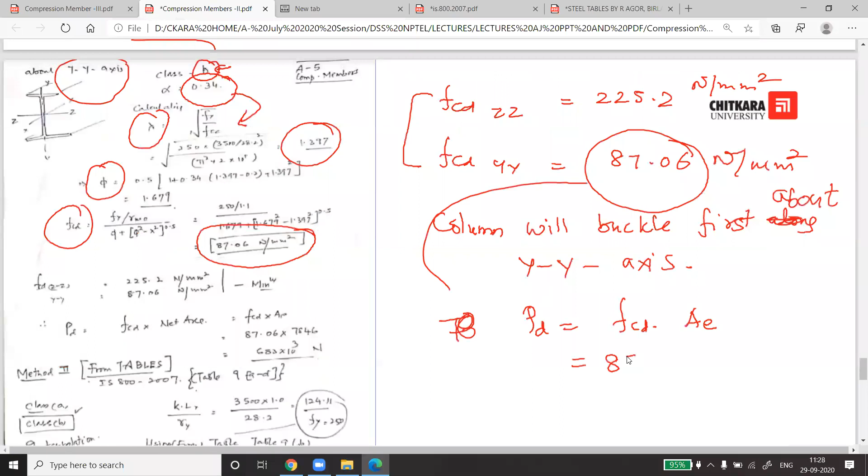is equal to FCD into AE, and FCD is 87.06 multiplied by area of the column which we have taken from the steel table, initially data is there, that is 78.46, then area of the column is 7846. When you do the multiplication, you can work it out, this value will be there, right? So this is method 1, which we have just done, based upon formula

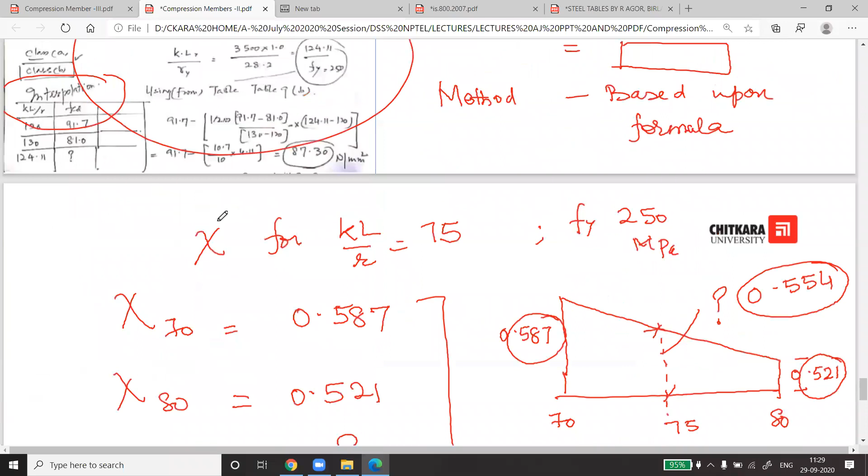So any questions from your side? It is very simple, just have to take the values in order and do calculations, right? That's the method. You have calculators, there shouldn't be much issue in this, right?

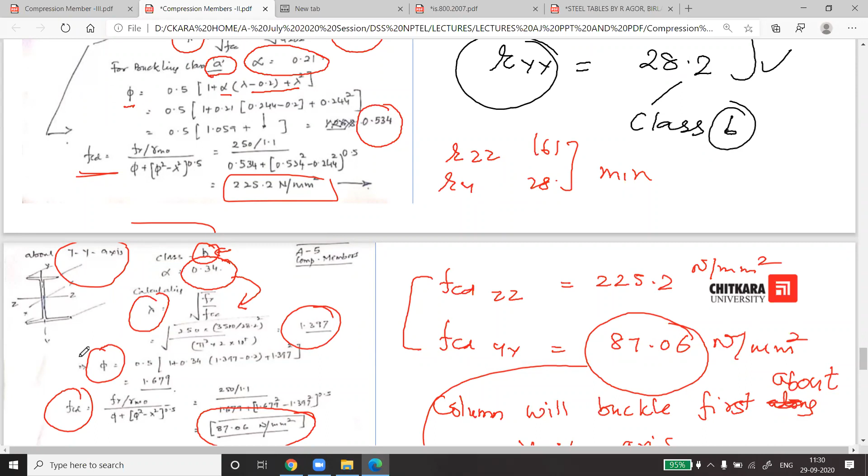Yes sir, okay. Radius of gyration is not the radius. It does not define that it is circular or something. It is a technical term which defines the strength of the member along a particular direction, or about a particular axis, right? This is what it means. So it is synonymous to moment of inertia, which is a parameter that again defines the strength along a particular direction and about a particular axis.